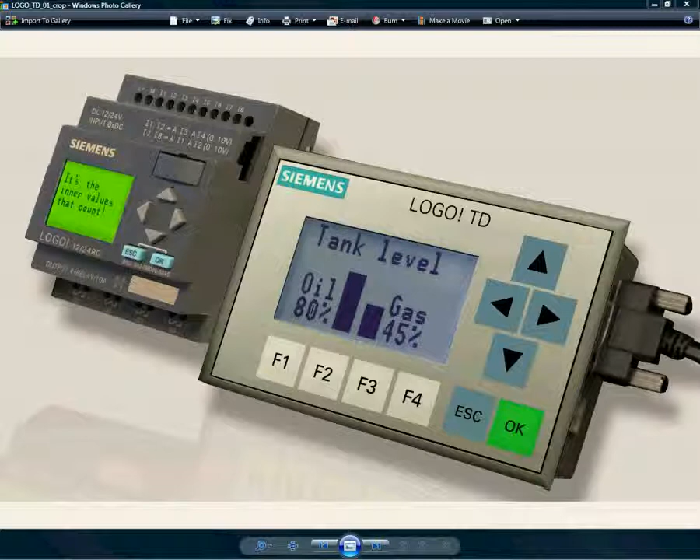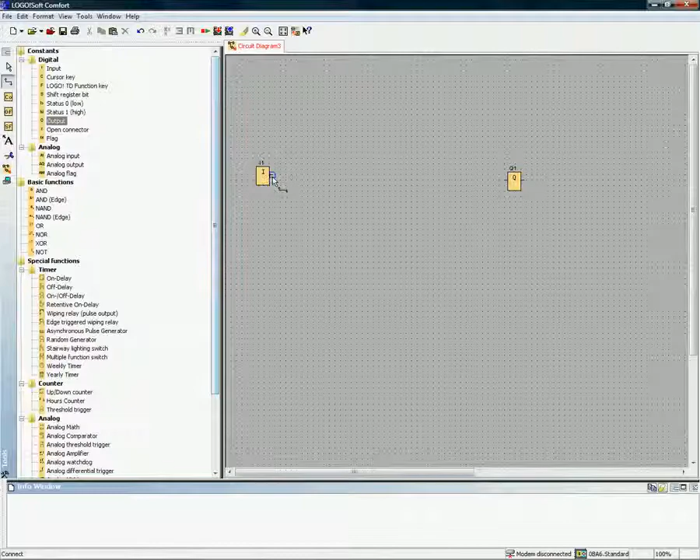It's written in Java, which means nothing more to us other than it can be run on an Apple or a PC or virtually any platform. And what's really neat about it is actually some of the features that come built in. I can grab an input point and an output point, stick them in here, and we just tie them together simply with a wire, and it has a built-in simulator.

So I can actually turn on the simulator and simulate turning on and off this input point and seeing the output switch back over. We can actually give these some names so they make a little sense. So I'm going to call this a start button. And maybe we'll call this the motor. Say motor 1.

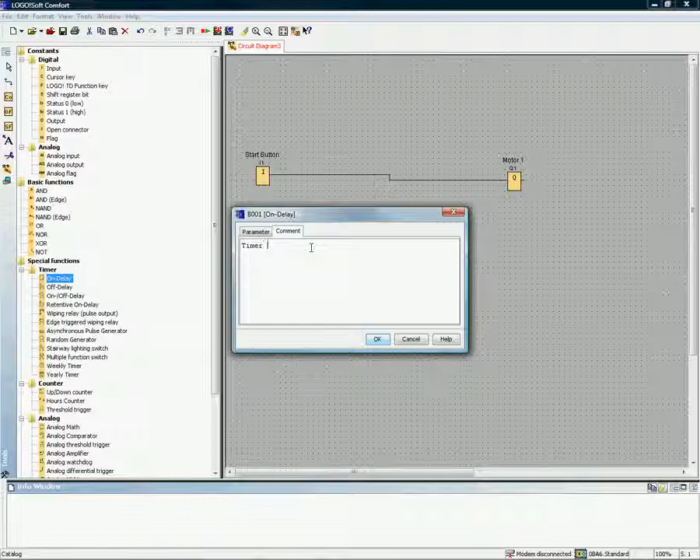So once again, we've still got our simulator running here, but let's make a little more logic than that. Let me give it an on-delay timer. And for a timer, we're just going to give it, say, a 10-second start. Timer 1. Name it whatever we like.

And now I can actually just grab this line and pull it off that one, bring it to the input of the timer, put another wire in, grab that to the output itself, and now when I simulate it, we're going to actually see the timer timing out, and once it gets up to its 10 seconds, it's going to actually pass power through to the output, and we'll see the output come on. Pretty neat stuff, pretty basic stuff.

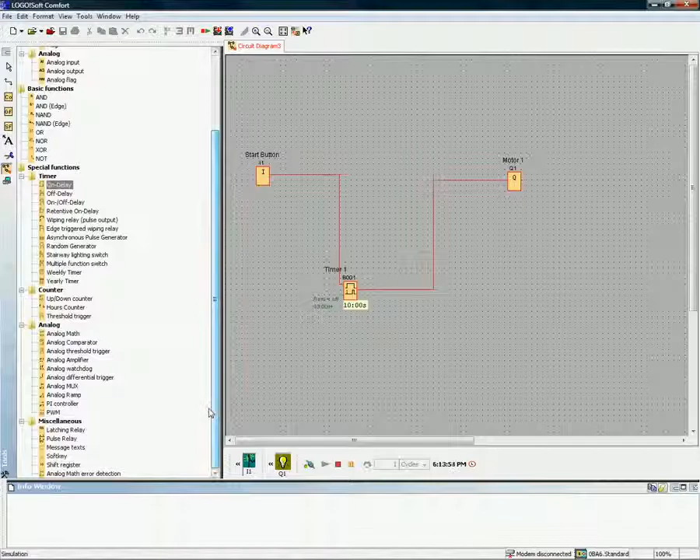But some of the neat features about LOGO include being able to add a little value to what is essentially right now just a timer relay because of this front display. The front display allows us to put any value or text that we want right up there, and the way we do that is we grab a block called message texts and double click it. And you'll see once I do, I've got available parameters that came from my program here.

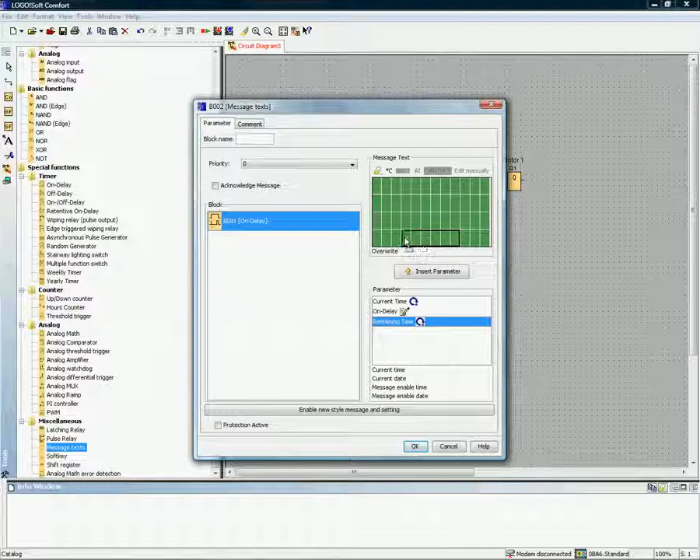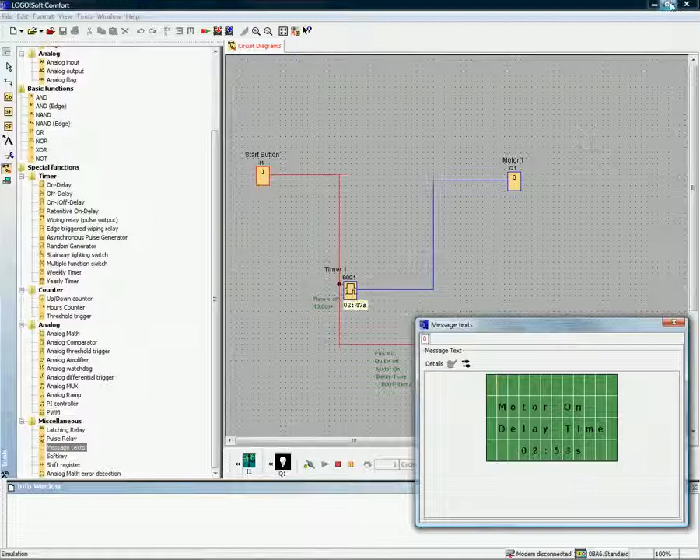Let's say the remaining time. Let's stick that up there, and we can say motor on delay time. Now I'm just going to grab a signal from my input button, tie it over there onto the display box, and run that. So now we'll see that nothing's going on until I push the button, and then we have a simulation of the front display from the LOGO popping up there.

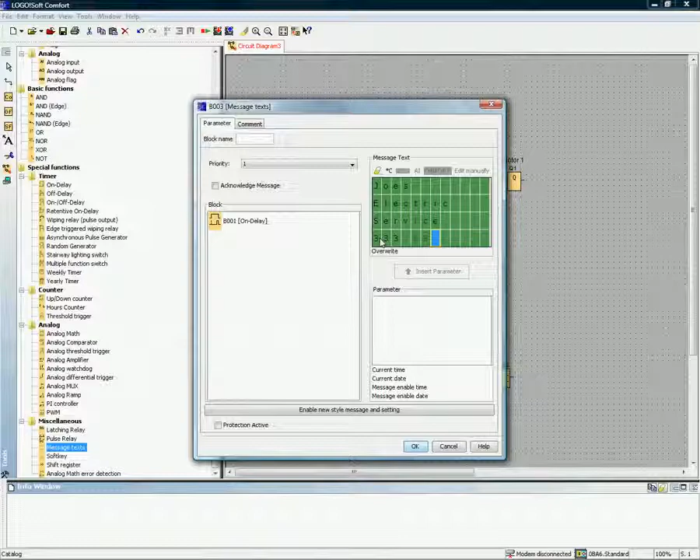Pretty neat feature. Let's add another one. Add a little value to our on-delay timer and say we're working for Joe's Electric. And we want to give him a service phone number. 333. I don't think that's anybody's number.

And now I'm going to tie that to a point that's always on. It says status 1 high. And to do that, we're just going to take a wire, stretch it across here, run our simulator, and now we see that Joe's Electric service comes up. When I push the button, uh-oh, I don't see my display. Why is that? Well, we've got two displays on at the same time here.

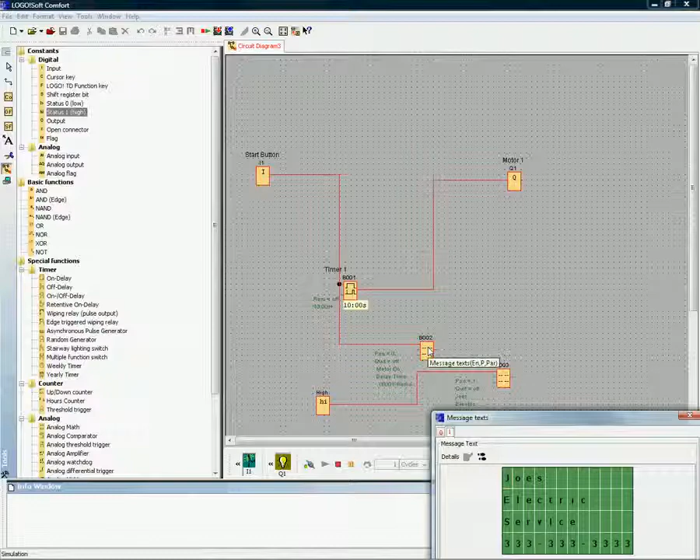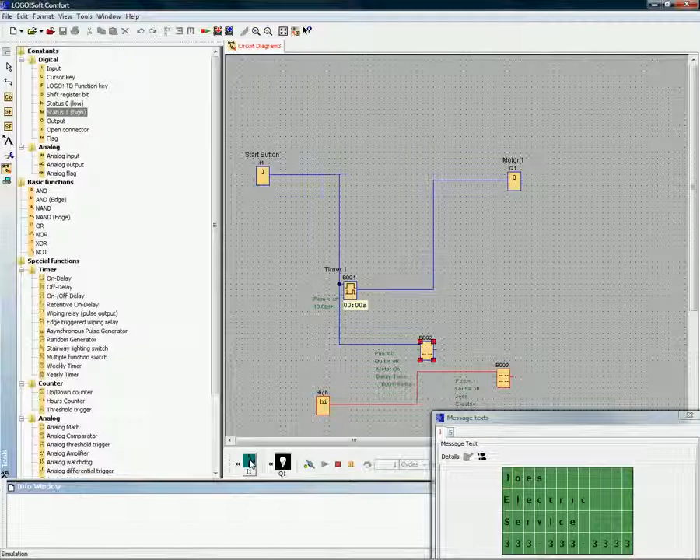Actually, if I look in here I can see them both on. But the one that's going to display is the highest priority. And the priority of our on-delay timer is only a 0. So if I bump that up higher than the Joe's Electric one, which was a 1, now when I do my simulation, I get my motor on-delay time. I turn it off and we're back to seeing good old Joe's Electric. Just a brief example of what we can do with this software package.

Oh yeah, and by the way, for you ladder logic fans, we can still do this in ladder as well. If you prefer that, it converts it right over, and now we see everything happening in ladder logic.